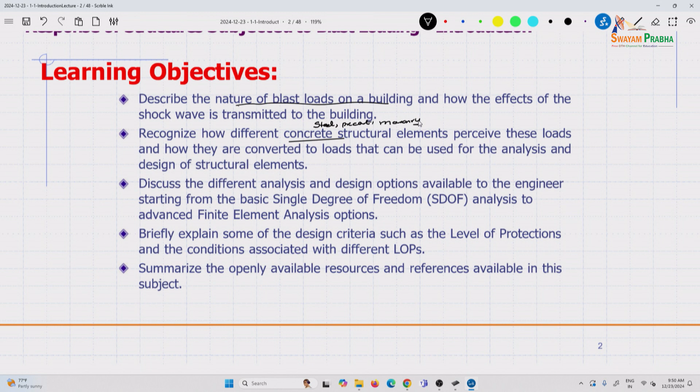And I did work a lot back in my engineering days when I was a field engineer, using IS 456 and IS 800, but unfortunately I've been for the last 30 years using ACI and AISC documents.

So in some of my design presentations, I'll explain those fundamentals, so I'm sure you'll be able to relate to that as well.

And one of the reasons we are doing some of these things is the UFC that I'll talk about shortly. A lot of units are also based on the FPS, or the US customary units, as they're called.

Foot-pounds and seconds, rather than the MKS or the SI systems, because the documents that we will use are based on that unit system. But it's easy to convert, and we'll see if we can provide some conversions as we go along.

So you'll recognize the elements, how they perceive the loads, how to convert a complex wave phenomenon such as a shock wave into a load that is transferable for design purposes and for analysis and design.

Then we also look at the different analysis and design options available to the engineer. In terms of analysis, we will look at a basic single degree of freedom analysis. You can do a lot of elemental designs just using single degree of freedom systems.

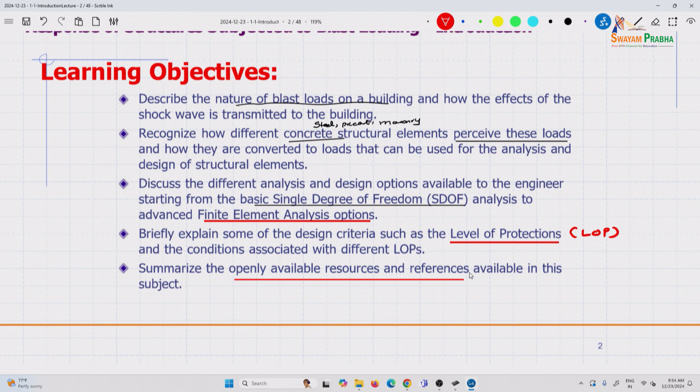And I keep, even yesterday, I was reading an article, and there's so many new things you keep learning, reading articles from different perspectives. What we will do is,

okay, there we go. So the reason I use this is a very simple software. I use this extensively in all my classes because you can easily convert it into a PDF and then upload it, and you can download it later on.

So some examples, of course, we have a few examples in India itself. This is the Twin Towers that you've seen,

9/11 that you have seen, and this had actually fatalities were almost 2,000 to 3,000 fatalities.

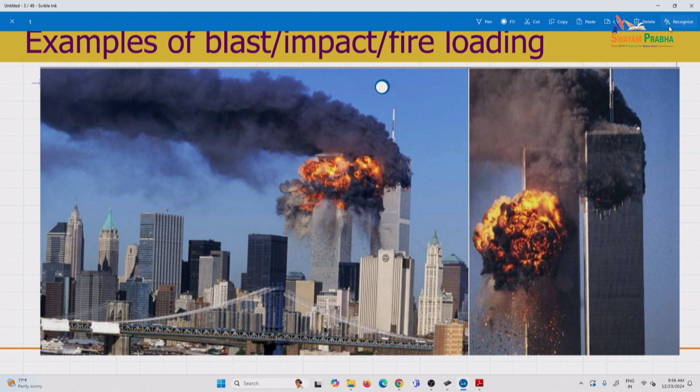Did I close it? I think so.

This had both blast and impact. Now, these are two different phenomena, physics-wise, altogether. We'll see if we can give an introduction to impact, but that will just barely touch the surface. This course will focus on the blast effects on structures, because the physics, the designs, the equations, everything is very different, as some of you working in this area already know.

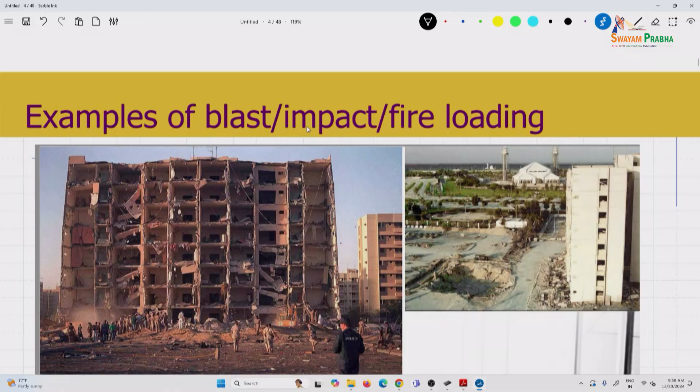Usually, unfortunately, in structural engineering, disaster is what motivates further research. If you look back to the 1970s, there were some extremely heavy earthquakes in the US, especially in San Francisco on the West Coast. Till then, research in seismic design was fairly minimal, but since that time, over the next 30-40 years, over $1 billion has been poured into research alone. Unfortunately, disasters are what force us to do further research, and that's what happened here as well.

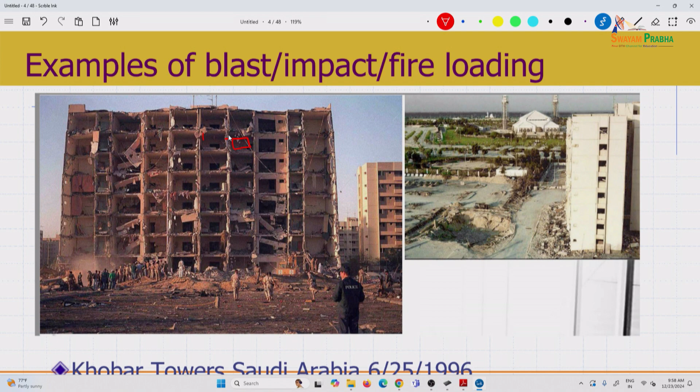This was the Khobar Towers, a residential complex. As you see, this structure was clearly not designed for blast effects. All of these are basically what we call curtain walls. So most likely there is a masonry wall here, and another masonry wall behind it. All these were separate walls, and clearly you can see the walls blown in. Observations like this prompt us to find ways not to design in traditional manners.

Then the other effect - this is the Oklahoma City bombing. All of these, as you see, are fairly recent, from the 1990s. This is actually very close to where I live. I live in a place called Kansas City, which is right in the middle, like Nagpur in India - Kansas City in the US. This is about 2-3 hours from where I live, maybe 5 hours.

This was a federal building with a courthouse. In the US, all the federal buildings - the main central government buildings - are governed by a certain set of criteria. They are not Department of Defense criteria; they're under what is known as the General Services Administration, or GSA, which has its own guidelines on design. All of these were originally designed as per GSA guidelines.

The problem with this building is that it had an underground parking garage. A truck bomb was placed near a very critical column. When that blew up, it definitely blew that column away, but a concrete building is designed for a lot of load distribution and redistribution. What happened here is it was not designed for progressive collapse. So the main failure of this, in terms of fatalities and everything else you see, was mainly progressive collapse. If the principles of progressive collapse had been applied to this building, perhaps it may not have had the impact that it did.

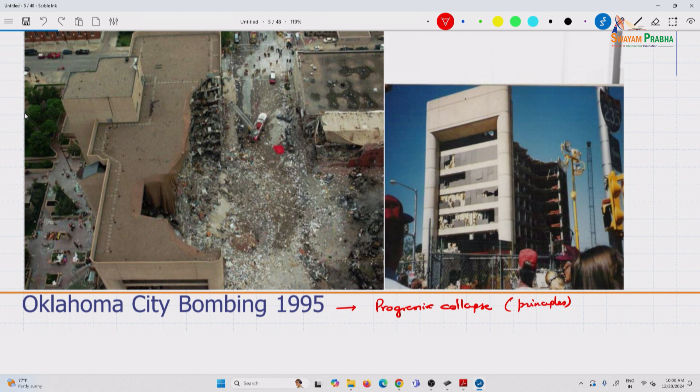That prompted changes to the guidelines in terms of progressive collapse and how to introduce those principles. There is a UFC for that too, which we'll talk about.

The other incidents I'll talk about are in Mumbai - the Taj attack. There you had almost 250 plus fatalities and also about 700 plus injuries. Then there's the other one, the siege - I don't know the exact numbers, you might know better - this had around 160 plus fatalities and let's say 300 plus injuries. So the effects of these can be fairly devastating.

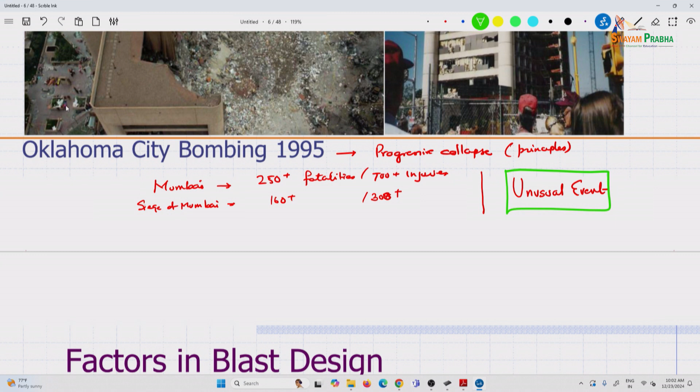But what we see in all this is an unusual event. The thing to keep in mind in terms of design - just like with wind, you have return periods, and with earthquakes, same thing, you have return periods, though now there are other ways to quantify earthquakes - here there is no return period. You never know what is going to happen; there are so many different factors, and that's what we'll look at later in the second session today. So what are all the different considerations when getting into a blast design? The first thing to keep in mind is that this is going to be an unusual event.

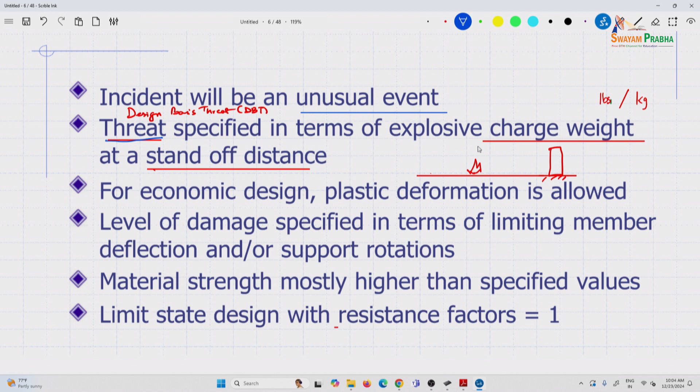There is also a standoff distance. What we mean by this is, suppose this is your structure, and the explosive is placed at some distance away. So you can see this is R going up to there, and this is the weight W.

Then for economic design, just like in seismic design of structures, in normal designs, even in the US we have strength design, and there's also an equivalent of stress design called ASD, allowable stress design, in steel structures. But in all those cases, those are all factored loads. Here, when designing normal tall structures, you're still designing at peak capacity, every room filled with live load at the same time.

The behavior is still elastic, right? It is still elastic, so think about that. You are not designing for plastic considerations, but of course under factored loads. So in seismic design, depending on the expected performance, now you have performance-based designs and more. Depending on that, you do have to go to plastic design, and we'll talk a bit about designing for plastic behavior - there's a session on elastoplastic behavior.

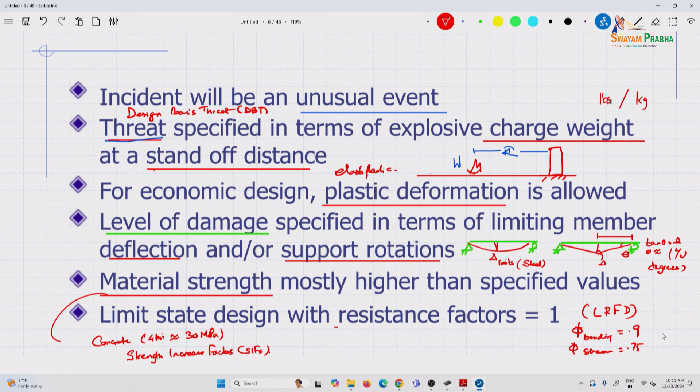And finally, the limit state with the resistance factors. We use the load and resistance factor design, LRFD, and there they have different factors. For example, in bending, it depends on the type of material, steel or concrete. So steel, for example, in bending could be 0.9, or in shear 0.75. These are strength reduction factors, but in blast we assume that it goes all the way to 1.0.

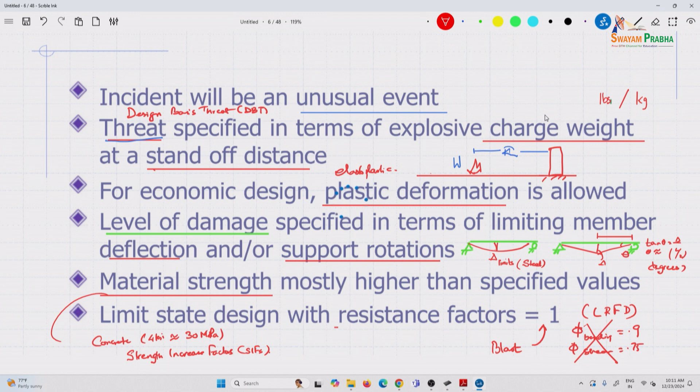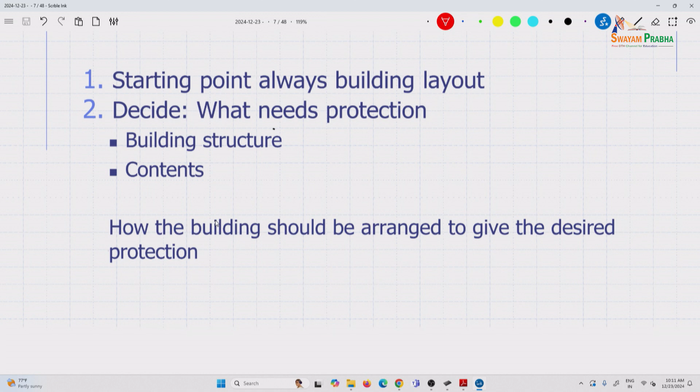So in terms of the design philosophy, the starting point is always the building layout. If you're working in the US, buildings are designed for blast; nowadays bridges are being considered, although codes have not incorporated it. People are working on it. There are guidelines, books, and articles on that. But in buildings, all DoD structures, all embassies, State Department structures, and all federal buildings are designed for blast resistance. And the starting point is always a building layout.

For example, if this is your available land, suppose this is your building layout here, and let's say you have a shape of a building like this, and this is your access roadway. Things to consider in design are these distances, R1, R2, and so on. These are just a few examples, and this would be R3. These are all standoff distances.

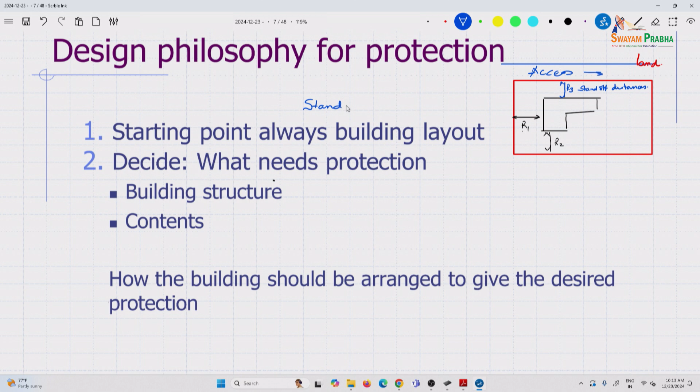There was an Oklahoma City bombing, same thing, but that was adjacent to a road. Whereas for other types of structures, if you can design and afford it, the standoff distance, as you will see later on, is the most important element in preventing any failure of the structure. The more the standoff distance, the better it is.

So if you can afford it, and if you have to keep certain other critical structures, for example your computer room or anything critical, your HVAC facilities, as long as they are away from access, you orient them, and this is something you have to work on with the architect. Quite often architects are the first people to start this process, but as a blast engineer you have to get involved at that stage itself and work with the architects. So the building layout is one of the most important aspects.

Decide what needs protection. Quite often in seismic there are building categories, based on whether it's a hospital, fire station, or a normal structure. But here the contents go beyond that. There's a whole array of contents you consider, starting from people. So people safety, any network, any critical equipment for a structure; if it's a law office and you have to store records, all those things become important in the design of the structure. And of course, the building itself needs protection.

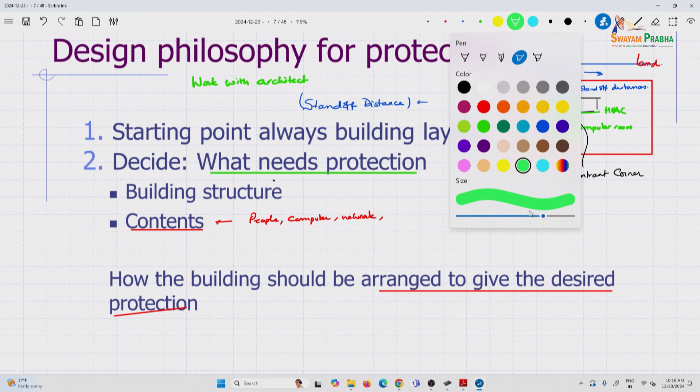Another thing that happens here is, for example, this is a re-entrant corner. So let's say if you have it in this place, this should be away from the source of the blast.

You're able to see what I write, right? The size wise? It's fine. Okay. So let me know if you have any questions. So meanwhile.

So any questions again so far?

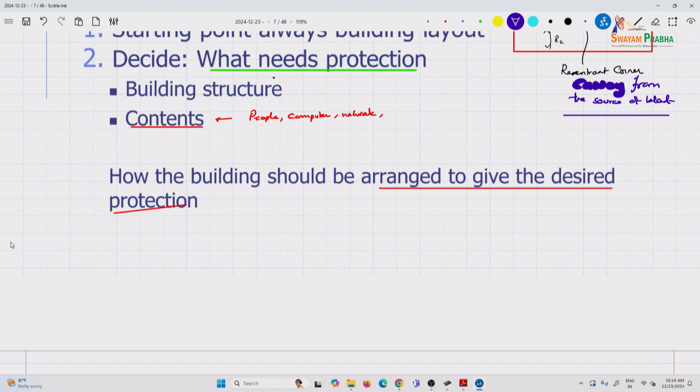A re-entrant corner is where, for example, suppose you have a building like this, right? And you have, let's say, this is the flow. And now at this corner, you can have vortices, right? So that is a re-entrant corner. Because here, if you see the flow, this goes into fluid mechanics. Flow goes around here, but here the flow goes in, it can get reflected, and here there is a lot of turmoil that goes on, vortex type.

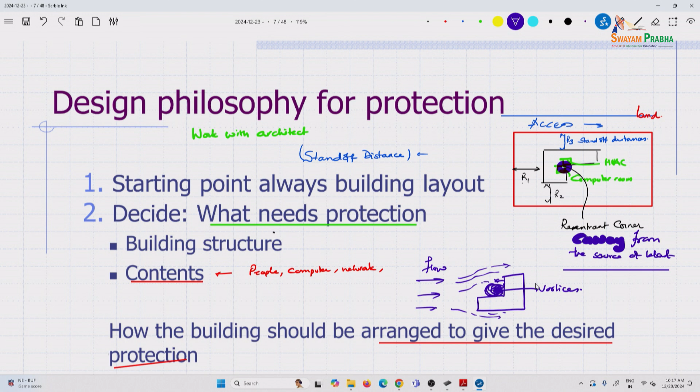And the reason you avoid those kinds of re-entrant corners: if you can completely avoid them, that will be the best scenario, because that way the uncertainty in the prediction goes down more than anything else. So we looked at how the building should be designed. So the next thing is, what are the building design requirements?

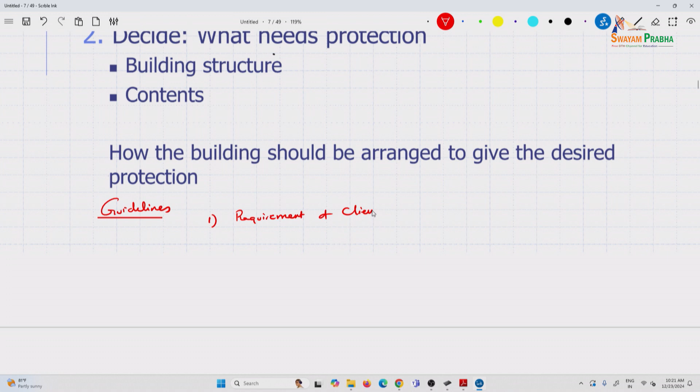As we talked about, the primary considerations that go in are the... so there is actually another, I think we missed it. So let me add that. So some of the guidelines here are, one is you first assess the requirements of the client. Then, once you have that, you're looking at the design features.

And I must mention here that quite often the client knows what they want, but as a blast engineer, you have to educate people on what they can expect. It's not a product where they get what they expect. Because of so many uncertainties involved, we advise every engineer who works in this area to clearly tell the client that what they get out of it need not be that, but these are what we know are the best practices. The word we use is best practices in the field.

Just like doctors, they use the best practices available. The outcome just depends on person to person. In a similar way, we take the same approach. Then the next thing to consider is the building form and facade. And then we go into the structural design itself, analysis and design.

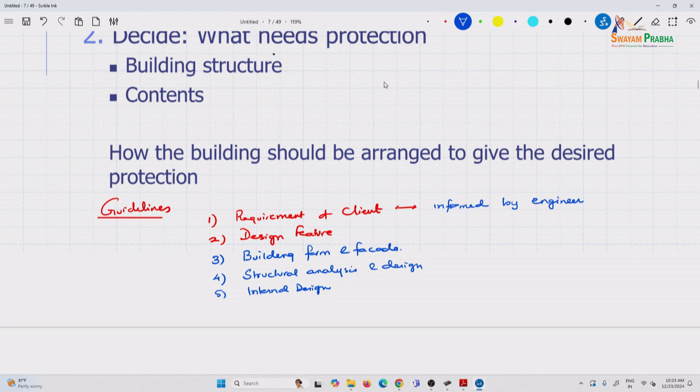And then finally, we look at some of the internal design aspects. For example, glazing, and doors. Doors that are opening out are better than doors that are opening in. Minor considerations like this should be taken into account when you're designing internally.

So for the building design requirements, the main things are to deflect the attack by layout, security, or it could also be by external devices to deflect, such as bollards. These are very commonly used, or you have your protective walls outside. So these are some things to deflect an attack.

And then the next thing to look at carefully is why that particular building is being targeted. People are not choosing a building at random. There is a reason they go for the Pentagon, for example, or the Twin Towers. The mission is accomplished by choosing targets that are of high value. So disguising the valuable parts of a potential target, and then how to disperse a potential target, so that any attack does not cause significant damage.

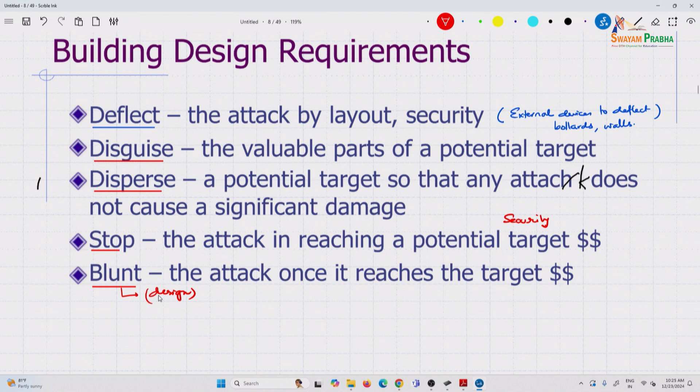And then, of course, the best ways are, you'll see all the security, TSA especially, things like that. This is to stop the attack. And if it does happen, this is where the design, as I had mentioned earlier on as well, is literally the last aspect of any design of a building for blast. So I think I was a little ahead, so here some of it is repeated. So we'll look at each one of them, the requirements of a client.

So for the first requirement, of the 5 different things we'll look at, let's consider a typical commercial multi-story new building. First of all, it is expensive to protect against blast. So as an engineer, you have to consider why it is needed. And if they move forward with it, there has to be an education coming from you based on rationale.

You come with reasonable calculations. Whatever we do this afternoon, we'll take up and say, this is why, this is what it takes to protect that particular building. Because the clients, architects and engineers have a number of choices. So the role of a designer is to advise the client based on basic principles. And some of the basic principles are what we cover over the next 10 days.

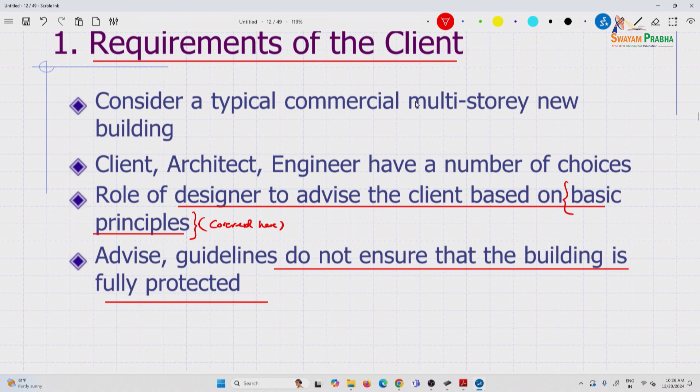Then advice guidelines: remember that they do not ensure that the building is fully protected. You have to clearly state that these are the best practices, and that's from the requirements of the client. And how do you convey these requirements? If it is a building offshore, we have, for example, ASCE 7, or if it's a building on a coast, you know the potential for cyclones, hurricanes, what kind of wind speeds there are.

So we really don't need to tell a client; as an engineer, I go to ASCE 7, I look up the wind speeds, from there I calculate my pressures, and I can go about designing the building. But here you have to talk of what the different LOPs are and where the client is comfortable in this case. We'll talk of different LOPs and how they come into the picture later on in this course.

Other things, blast mitigation, we'll cover a little bit of it later on. Hardening the structure is basically adding components in addition to the primary structure, such as polyurea coatings or other such things. You want to harden the structure. Blast mitigation is additional things that you add structurally in order to reduce the effect of the shock on a structure.

So the thing that gets most affected, which as structural engineers we don't ever get into, is glazing design. I've worked with glazing experts and they do their own analysis, with different types of glasses they come up with. So structural engineers rarely get involved in glazing design. But here it's good to have an idea of some, because that is the one that is most affected in any blast environment.

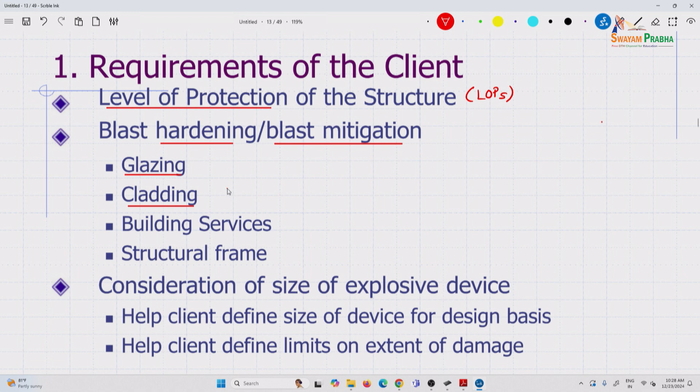What are the claddings? Claddings are nothing but the walls that you've seen that blew out from the Khobar Towers, a similar picture like that. So these are basically non-structural walls. Other building services, HVACs, lifts, elevators, those kinds of things, and then finally the frame.

So the level of protection leads to the consideration of the size of the explosive device, and we'll look at a few different types of explosive devices. So you help the client define the size of the device, basically the weight in kilograms, and define the limits to the extent of damage. This is again based on the level of protection.

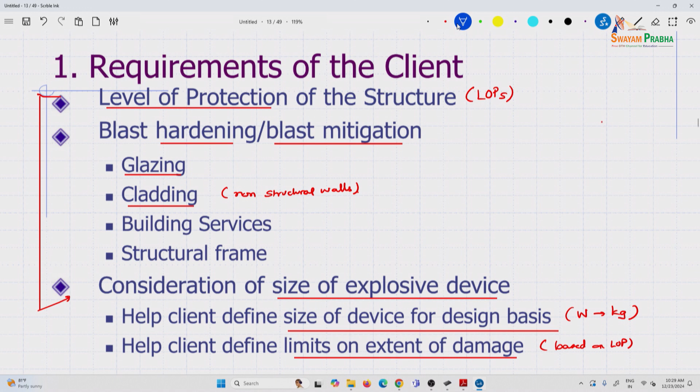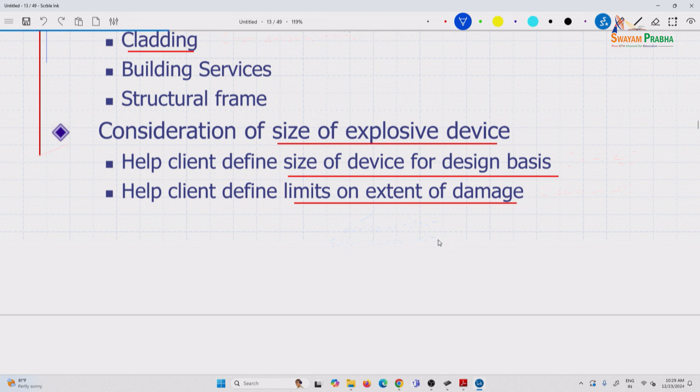The other things you can advise them on are based on your deflection limits or support rotation limits. So advise them: if the structure can go, say, 8 degrees of rotation, what it actually means to a client. How does it convert into what they have to do once that event has occurred?

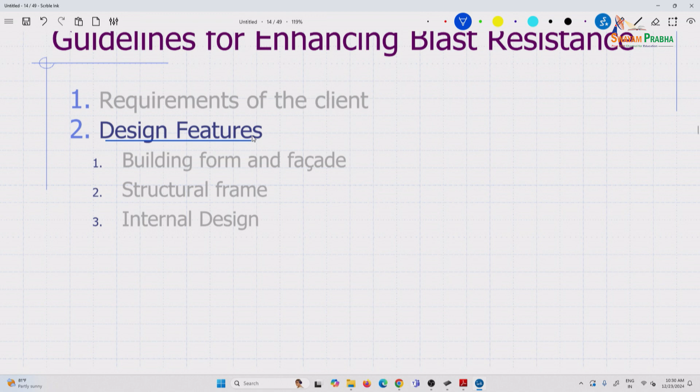Then a little bit on design features, and again this is very subjective. We'll just talk about it. Standard building design features can be at odds with blast protection and resistance. So this is something we all should be aware of. Architect-engineer fights are very well known, right? You never see eye to eye. This can be even more challenging.

So for example, floor-to-floor curtain walls in multiple stories designed for regular loads can be a hazard. So you're changing the entire philosophy of that structure itself, right? In many buildings you see out here, what do you see? Columns and beams, the structure goes up, and then they come in and put some masonry wall and you're done. But that's completely contrary to blast protection. That is a no-no in that case. So form of facade failure, loss of life, internal finish, all these are different things that we have to consider.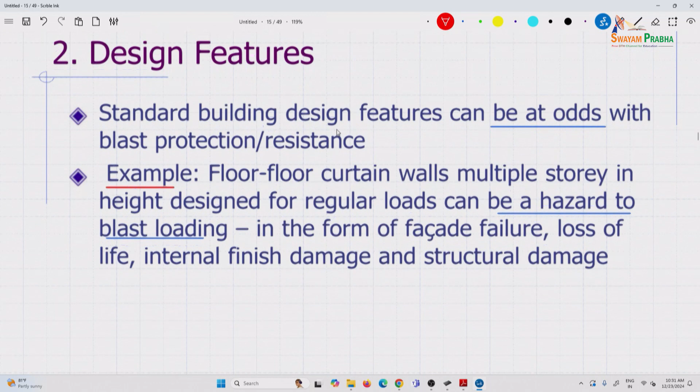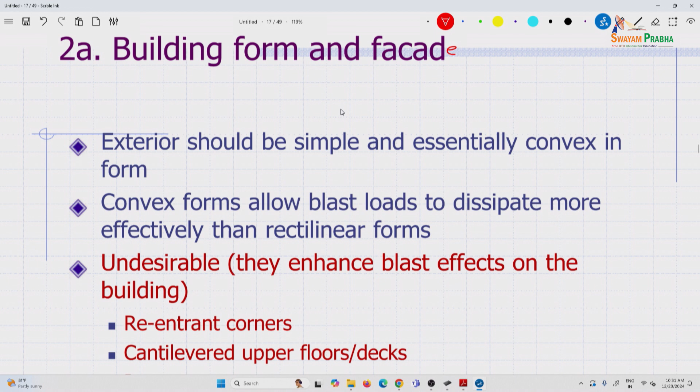Then looking further, building form and facade: the exterior should be simple and essentially convex in form. Now, why is this the case? We'll talk a little later on about the type of pressures that occur due to a shock loading.

Just to give context to it, there is what is known as an overpressure or an incident pressure. There is a reflected pressure, and there is also diffraction. Convex structures tend to smoothen the airflow around them, sort of the wave flow around them. So that reduces the resistance effects. That's why convex forms are preferable, circular convex forms.

They allow for the loads to dissipate more effectively than any rectilinear form. These rectilinear forms are undesirable as they...

...enhance the effects are re-entrant corners, and somebody asked about it, cantilevered upper floors and decks. It's very common to have, even in the lobby area, an 8 to 10 foot entrance area where cars come in, and those can be, especially in a public building, very dangerous. How to mitigate or avoid that are considerations you talk with the architect. So re-entrant corners we have talked about.

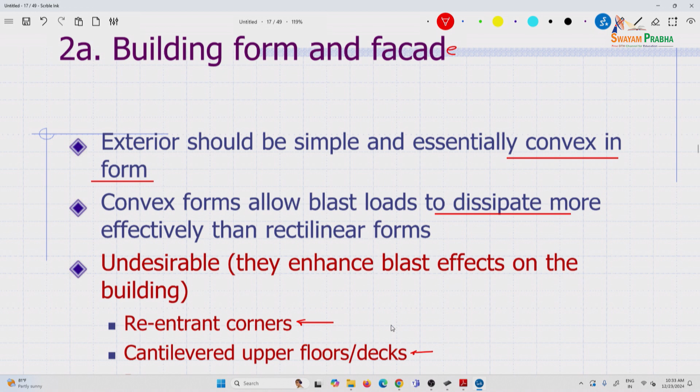Recesses: so a re-entrant corner is, if this is the building, that's your re-entrant corner. And recesses, if you see, this is nothing but a building, so this would be a recess. And here also you can see that there is a lot of complexity, so the wave or the pressure wave on the structure can be fairly complex in these types of configurations.

Then internal courtyards and arcades can be beneficial, or undesirable in this case. Again, this is an internal space that can be a place where people use that as a source for an explosive. If you're not able to get a truck bomb or a car bomb, multiple people can get in with suitcase bombs and others, and that really becomes a danger spot. So these are some things.

You may not succeed with a lot of these ideas with the architect, but these are some things that you can, as they say, educate the architect about and let them make the decisions.

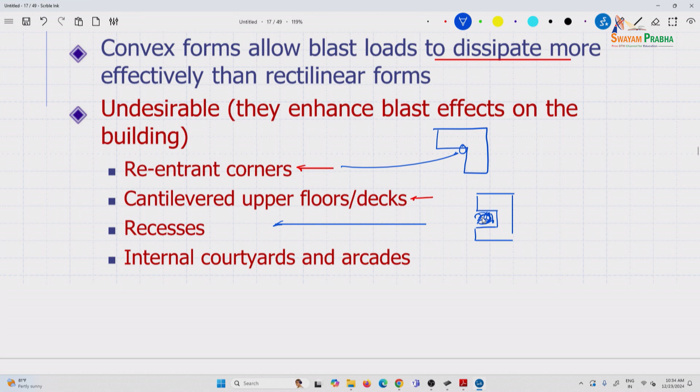If you look at features that facilitate protection, our minimum glazing considerations: although there is a lot of research done on different types of glasses, using single layer, double layer glasses that don't shatter, using PVB layers in between. Those considerations can still be adopted, and that's why we will touch briefly on how thick a glazing should be. It's just a short topic we will consider later on. Minimum glazing considering aesthetic, thermal, energy efficiency, acoustic, and lighting issues in parallel with security issues.

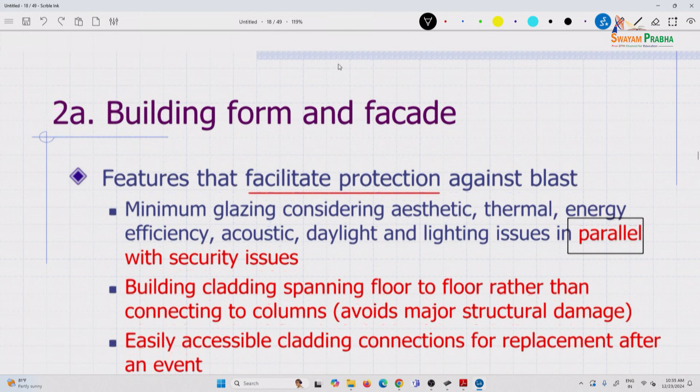Then building cladding spanning floor to floor rather than connecting columns. So this is interesting, let me get a quick drawing here. If you see, if you're connecting columns, these are your two columns in this case.

These are the two columns, and if you span them this way, building cladding spanning floor to floor rather than connecting to columns avoids major structural damage. This is just in how you design. For example, if you can have a continuous connection into the beam itself, you're avoiding a blowout, because it's hard to connect into a column, but into a beam and a slab you're able to connect it better. So that way you're avoiding a blowout into the room itself behind it. That is one thing to keep in mind.

Then easily accessible cladding connections for replacement after the event. And again, the recesses we talked about: one other reason is, apart from your vortex flow inside the recess, it's also to conceal, because that's a place where explosive devices can be concealed.

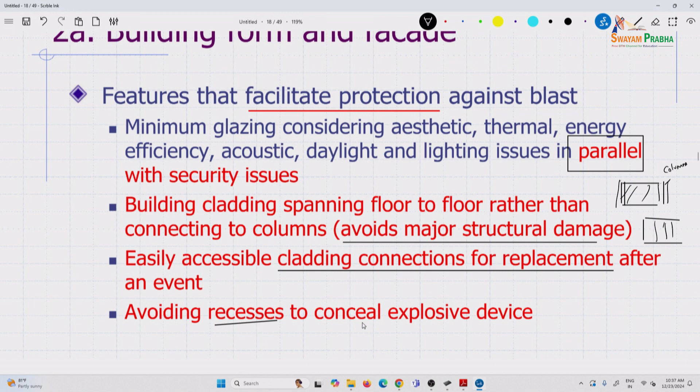Continuing further, features that facilitate protection: avoid deep window sills and surfaces which can augment blast loading effects. Again, keep the windows in line with the structure, with the walls itself, and especially if the windows come out rather than come in, that also is a helpful feature.

There are catch curtains you can have in the back, but those are additional things that you really need to do only unless it is actually required. It's a very critical location.

We go till what time? 12:15, right? No, 11? Oh, 11, no? So I better hurry up. We'll take it as it goes, there's a lot more to go in the first one.

But then avoid window openings, I talked about this. If required, have openings that open outward rather than inward openings.

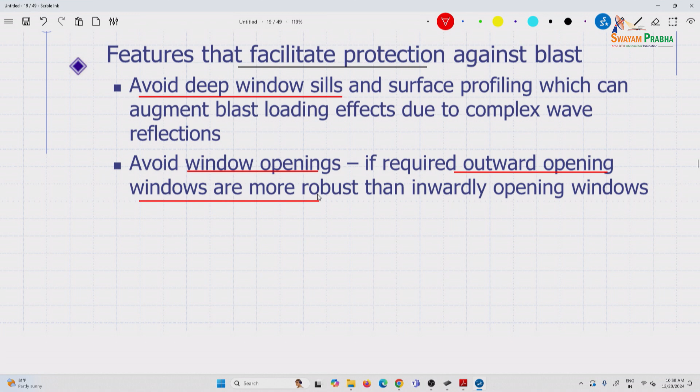Then coming to the structural frame. This is where we as structural engineers come in and we're most comfortable within our zone, so to speak. From a structural frame perspective, the essential requirement is that the structure be well tied so that its overall inertia is used.

What does that mean? In seismic design, you go low mass, low weight. Why do we lower the weight? Because you're going to reduce the building weight. That reduces inertial forces, right? What is inertial force? Mass times acceleration. So less mass means less inertial force. But in blast design, what do you want? More inertia.

So in blast, this is just the opposite. You want more inertia, whereas in seismic you want low weight, meaning lesser inertial forces.

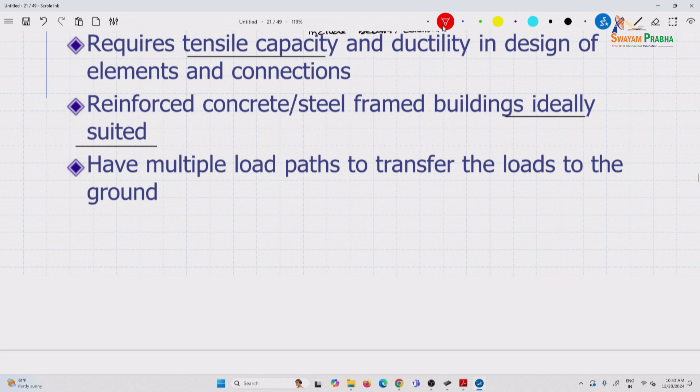Another thing we consider, and we'll look into progressive collapse as one topic, is having multiple load paths. Let me go back a little - I want to spend just a minute on ductility. What is ductility? Can anybody define it?

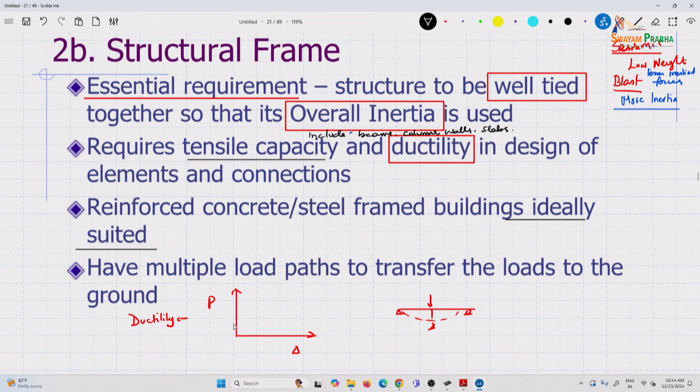Deflect more without loss of load - that's the second part. A lot of structures deflect a lot, but doing so without loss of load is very important. For example, take a structure - plot P versus delta for a simple beam with load P deflecting delta. In one case, P versus delta goes up and then it fails. In the other case, P versus delta reaches the same deflection in both cases. Which one is more ductile? This one. Quite often, in my experience, people think ductile just means a lot of deflection, forgetting about the second aspect.

So keep that in mind: ductility means large deflections without, or with minimal, loss in peak load capacity. It takes a lot of detailing, primarily detailing - this is not necessarily a strength criteria because structures can achieve strength regardless. Quite often it comes down to how your moment connections are detailed. Quite a few structures designed for blast are derived from principles of seismic detailing.

So you start somewhere - a lot of research has been done. For those of you not familiar with it, have you heard of AISC? It's the American Institute of Steel Construction.

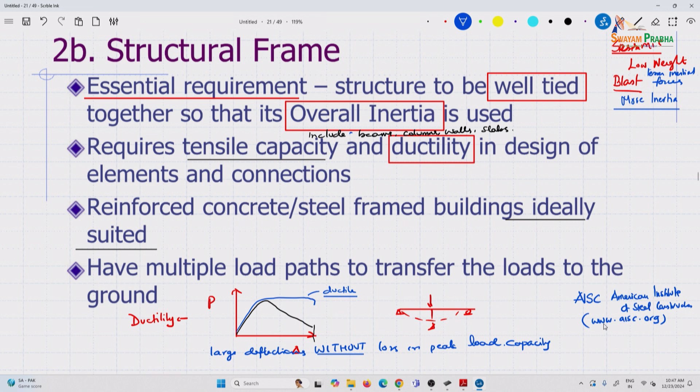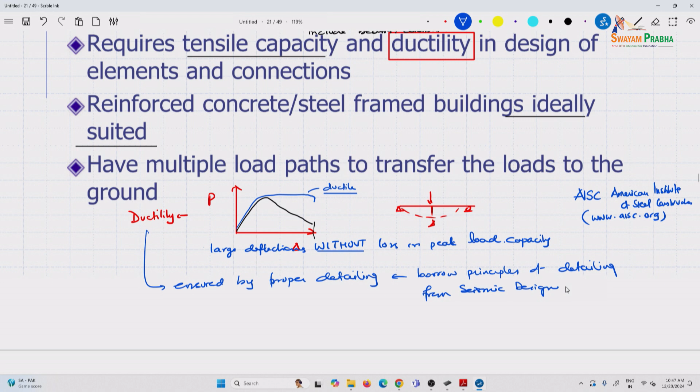So many of those principles apply. Ductility is ensured by proper detailing, and again you can borrow principles of detailing from seismic design. There is a variety of design guides for detailing moment connections, especially in steel. There's a whole big book on that. You can always look into those resources.

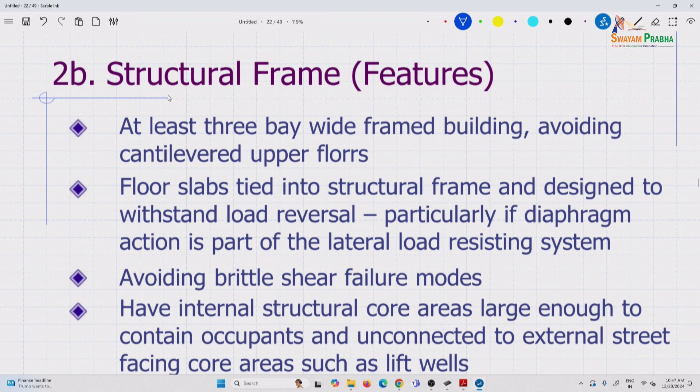Then the other thing we talked about is multiple paths, load paths. Let me briefly talk about it.

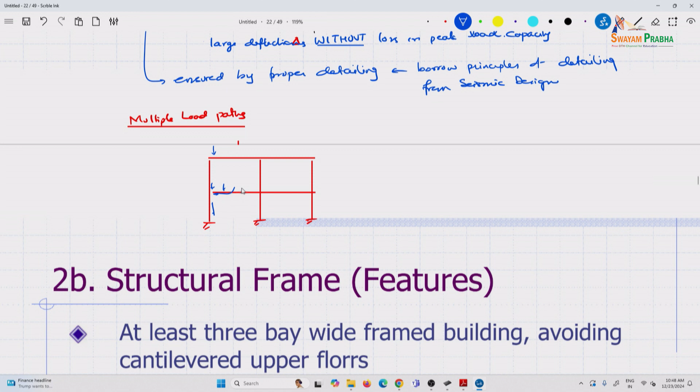For example, you have a building here this way. So quite often you design for loads coming down the column this way, so the loads are coming up and down the column in this manner. But when you design for multiple load paths, you also perhaps have to design this building for something like this, so now you have another pathway for the same load to come down. So this is pathway 1 and this is path 2.

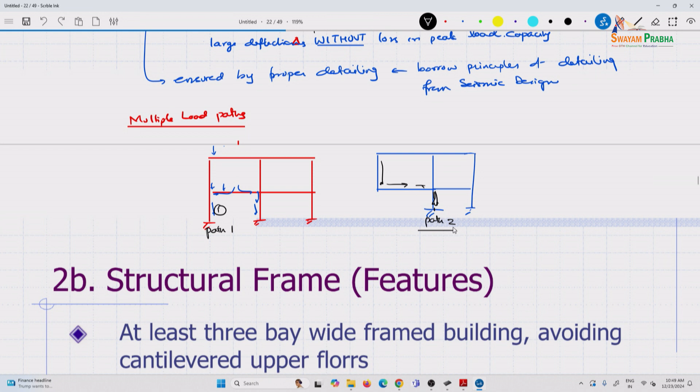You see now that will require additional design work, but at the same time it does add to certain costs. So there are all these things that need to be considered. Multiple load paths, especially in design, is very important.

And you can't predict everything, so there are certain best practices - that's why we are engineers, right? The word engineer, what does it mean? When you are engineering a building, all 15 of us or 20 of us can design it in different ways. But the building will behave the way you have designed it, right? Each solution is the right answer because the building load path is going to be the way you have designed it.

If you don't want the load to go through a certain beam, you can design it that way. Make the beam less stiff, it won't go. It's very interesting - the first building I designed, I was M.Tech, I finished, and I got this project to design a multi-story building.

We had a corridor and my boss wanted the corridor to be spanned by a beam, a continuous beam going all the way, and then I saw the corridor is only about 1.5 meters or 5 feet wide, and the rooms are about 30 feet long, right? This particular beam was, analysis-wise, attracting so much moment. And I said, there's no way I'm going to design this for that moment.

Why was it having so much moment? That beam that was spanning - let's say you have a frame like this, right? It's a very simple concept. So now you're designing this particular beam. Why was this beam attracting so much moment?

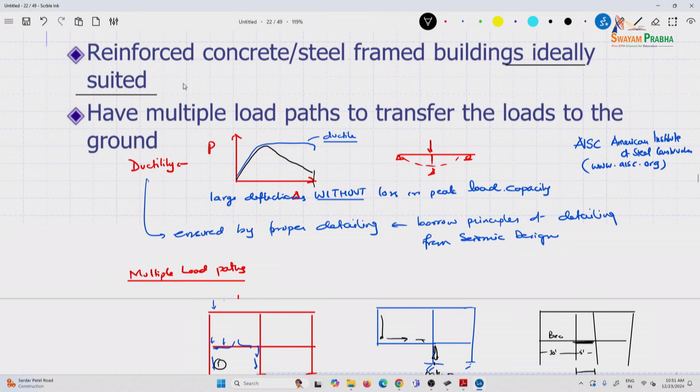And then how to avoid it, what are other design aspects that you must consider. That's where, engineer-wise, we are really given very few opportunities to be creative. Architects are the creative ones - they've taken 95% of the creativity in a building. We bring in the creativity in this manner, right?

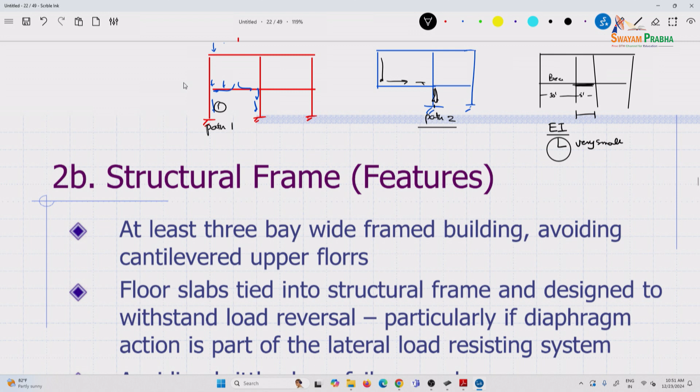Other simple things are: consider at least a 3-bay wide frame building, avoiding cantilevered upper floors - we have talked about this. Floor slabs, we've also talked about this, tied into the structural frame and designed to withstand load reversal.

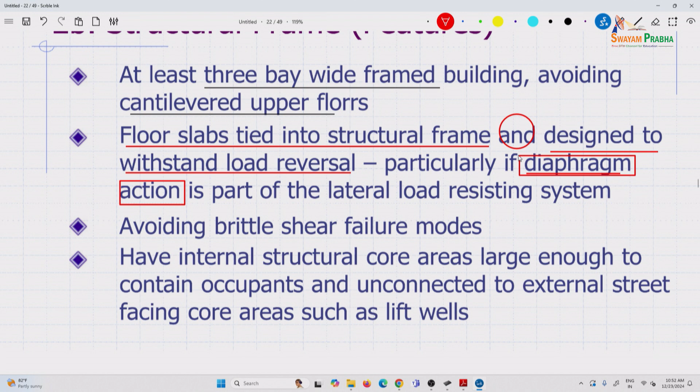Most of the times we are designing for gravity loads, but then explosions can be the other way around too, so you'll have to reinforce in a different manner, particularly the way we consider slabs to be part of the inertia - the diaphragm action - taking it as part of the load resisting system itself, and this is very critical, the next one.

Avoid brittle shear failure modes. Brittle shear failure modes - these are catastrophic.

So detailing for shear and increasing shear capacities, your goal in these cases is that flexural capacities should govern. Primarily this is because flexural behavior is more ductile, while shear is a brittle behavior.

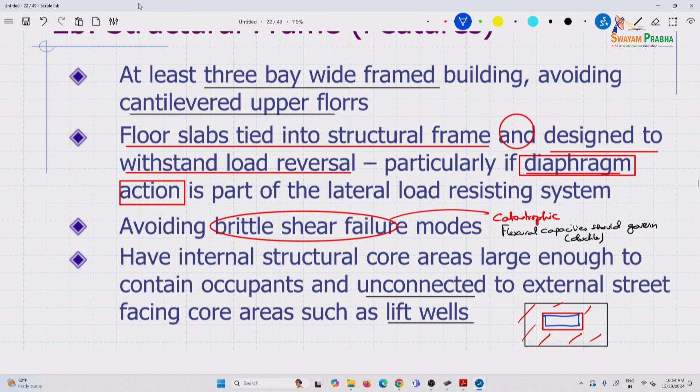Have internal structure core areas large enough to contain occupants, unconnected to external street-facing core areas such as lift wells, so you can evacuate. In this case the load from an explosive is not transferred to that particular structure. You might have an outside core for the building, and then a completely separated internal core, so you'd recommend two walls or something like that to prevent harm. It's hard to predict, but if that's an option, you could look into it.

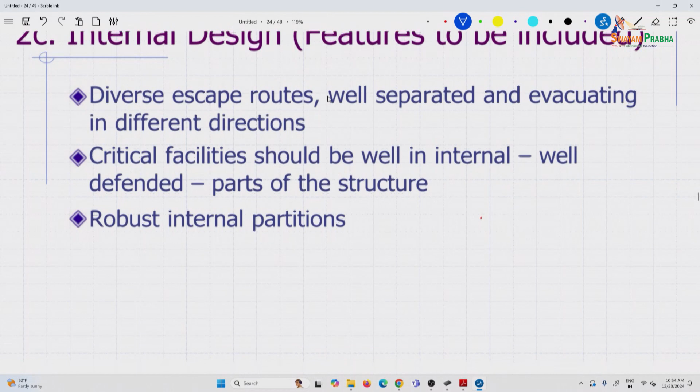Then we talked of internal design. If you remember, these are the different things we looked at: have diverse escape routes, well separated, and evacuating in different directions.

Again, as engineers, we don't get exposed to blast design. Imagine architects—they are not exposed to this at all. There are bridge architects because you can still make a living designing bridges, but you're not going to make a living as an architect doing just blast design.

So often it becomes an engineer's role to educate the architects. Critical facilities we talked about should have well-defended internal parts and very robust internal partitions. These are all basically containment strategies.

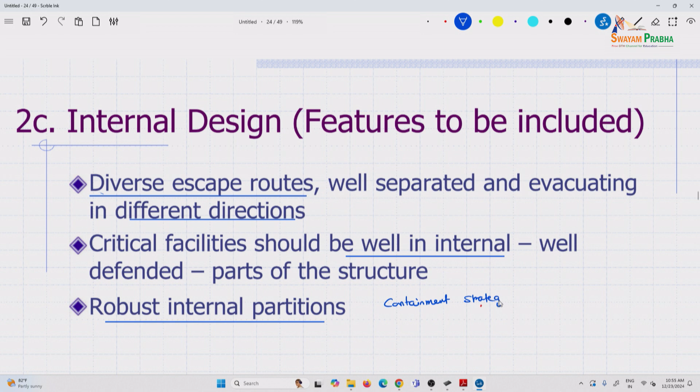So what are some of the important documents? Again, I go with what is available, and you should be able to download these. We'll look at several of these over this course.

One is the UFC, the Unified Facilities Criteria. Now, I think as of October, some things—the way the repositories are—are changing. Before, I think this website may not exist; I just checked, and I think when we were designing the course, when I last taught it, it was still there. But I taught this in summer—I teach this course every summer, a course similar to this. WBDG is the Whole Building Design Guide, but now I think that goes under NIBS, so the repositories may look different. They haven't quite updated because the work started in October, I believe, but it will lead you to where you need to go.

So this is DoD's Minimum Anti-Terrorism Standards for Buildings, UFC 4-010-01, and there are other releases as well. Then the UFC document we will be using quite extensively is 3-340-02—you'll read papers in this area, and a lot of them will refer to 3-340-02. That is Structures to Resist the Effects of Accidental Explosions. This was based originally on what is known as TM5-1300. The Navy, Air Force, and Army each had their own documents; all of these have been combined into one in the 340-02.

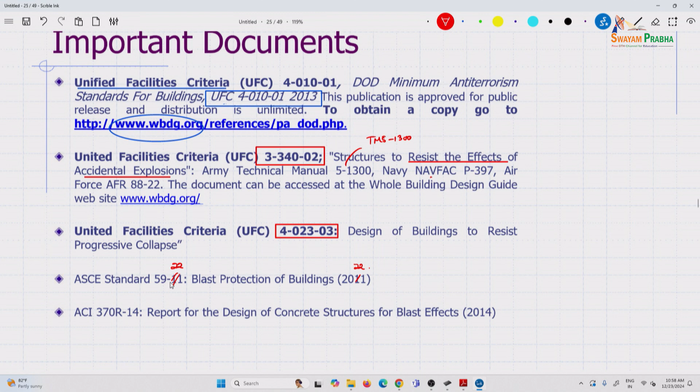And then I've got a couple of documents—we'll go over this a bit today. 22 is the latest version of it, the ASCE standard. ASCE is the American Society of Civil Engineers; Committee 7 works with load standards on loads, and Committee 59 is on blast protection of buildings. They have updated it, though it doesn't get updated every 6 years like the others do—this one got updated 11 years later.

This is the committee for which I'm the chair, and we worked quite hard to update this document. Hopefully this should be called version 24 or 25. We worked through the whole process—it takes a couple of years. I started the process to update it in 2022, and in 2024 I finished my term. It's continuing with the next chair, but it's still not completely voted in. These things take 2 or 3 years.

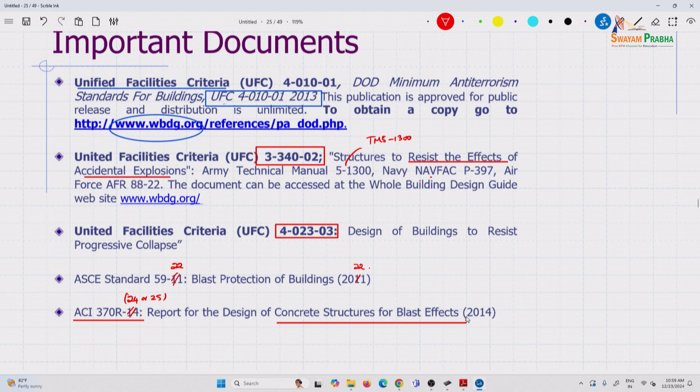So this document you can purchase—it is not a free download. Both of these standards are not free, but the first three documents are publicly available.